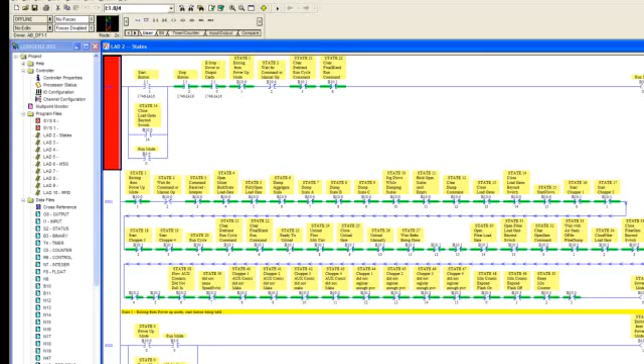Ron is a very effective trainer with a different approach that will straighten out a lot of misconceptions about the PLC, not only for beginners, but for those with many years of experience. Ron is going to give us a quick demonstration of the differences between his PLC Boot Camp approach and other training methods. Well, we've got a long way to go and a short time to get there, so let's get started. These videos are just a quick preview of the type of material you'll cover in one of our PLC boot camps.

and of how different our classes are from any other training approach. Don't expect to sit back and listen to long lectures, and we never use PowerPoint slideshows. Instead, we've built our entire hands-on training approach around a problem-solution format. Basically, we set up one realistic problem after another and then coach you through a systematic step-by-step process of finding the solutions.

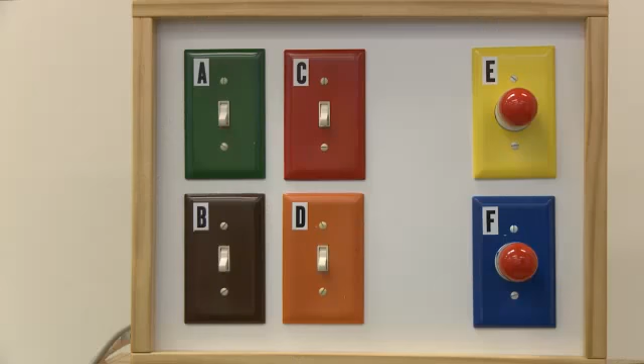For our first video lesson, we'll use this simple little light box for a quick warm-up exercise. Even if you're beyond the beginner stage, stay tuned for just a few minutes. This uncomplicated little box has bewildered quite a few top guns over the years. Let's see how well you can do against it.

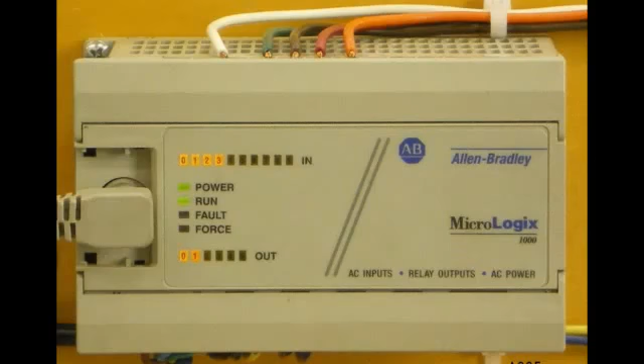If you want to try our first sample problem at home, a MicroLogix system will work just fine. Depending on which boot camp class you sign up for, we'll probably be using either an Allen Bradley SLC 5/04 or an Allen Bradley PLC5 system to control the light box. And yes, we do have boot camp classes for the ControlLogix platform too.

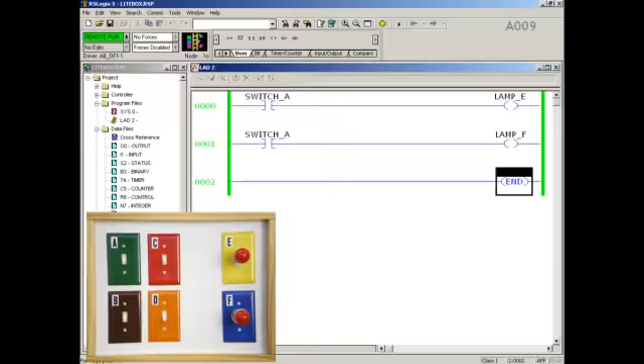And now here's a simple warm-up exercise for the light box. First, here's how many people try to explain the operation of this little program. A warning: what you're about to see does not follow our boot camp approach, and it is not correct. But unfortunately, this is the way a lot of experienced technicians think PLCs operate. We'll identify and correct the mistakes and misconceptions throughout this series of videos.

We'll start with switch A in the on position. Notice that both lamps are on. Many people explain this result by pointing out that the contacts for switch A are called examine if closed or examine on instructions.

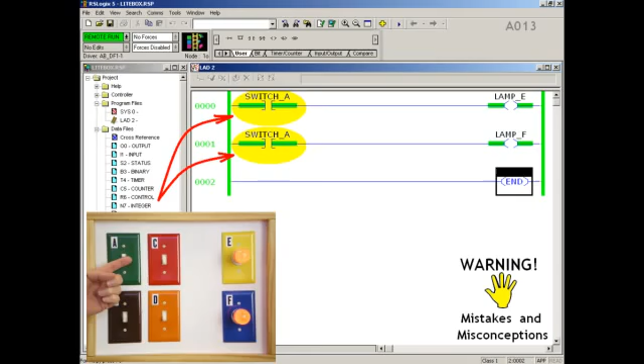Many people believe that each contact in the program examines switch A in the field to see if the switch is closed or on. Since the switch is closed in this example, the contacts in the program change state and become true. The PLC processor marks them green on the screen to indicate rung continuity and allows power to flow from left to right through the rungs.

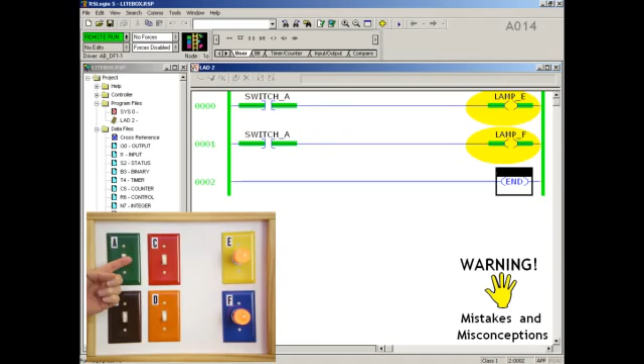Many people say that as the power flows to the right, it reaches the outputs of our program and makes them active, as indicated by the green displays on the screen. These parts of the program are called output energize instructions. Many people think that these work like relay coils, and since they're active in this example, they energize the outputs in the field, which turns on lamp E and lamp F.

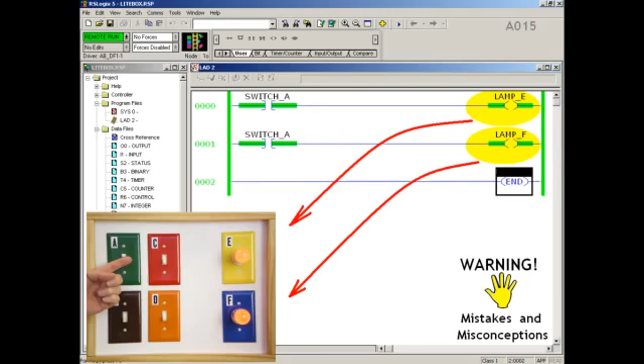Now let's turn switch A off, and now the question becomes, what made the lamps go off? To answer that, many people go back to the contacts again. Many people explain that now when these contacts examine switch A to see if it's closed, the conditions are going to come up false. That's because the switch is off this time around.

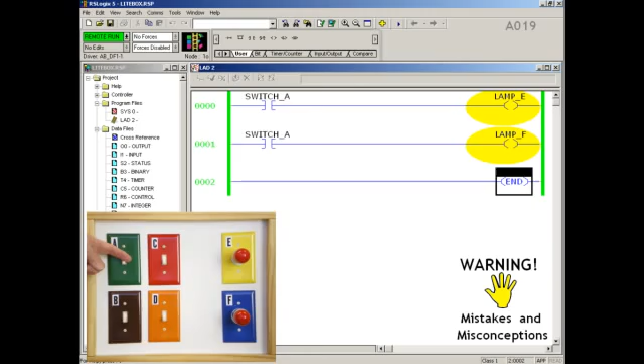Notice that the contacts aren't green anymore, which means that the power signal will not be able to flow through the rungs. Many people use the term inactive to describe the outputs when they're not being powered, and they say that you can tell that these coils are inactive because they're not being shown in green. Many people say that since our relay coils are now inactive, naturally they can't energize the outputs in the field, and that's why lamp E and lamp F both turn off.

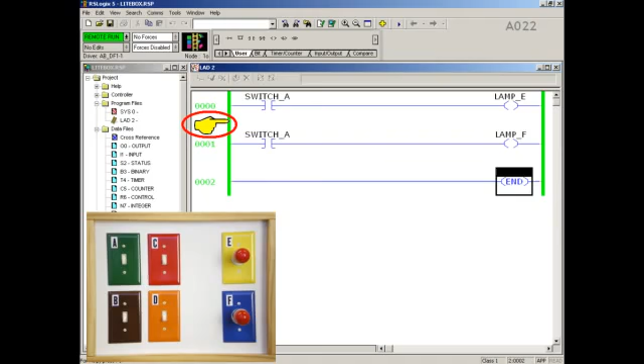And so now we're through with our little warm-up program. Now let's crank it up a notch. Keep your eye on this area right here. We're not going to make any changes to the two rungs we've already checked out, but we are going to slide a new rung right in between them.

If you're like 99% of our students, you've already been through someone else's PLC training, and the explanation that we ran through a few seconds ago was probably very similar, or sometimes word for word, to what you've already been taught. And let's be honest, those mistaken explanations will work okay, but only as long as you stay at the beginner level. Once you start working in the real world, you'll find a lot of situations where the theory you learned doesn't agree with the reality of your problems.

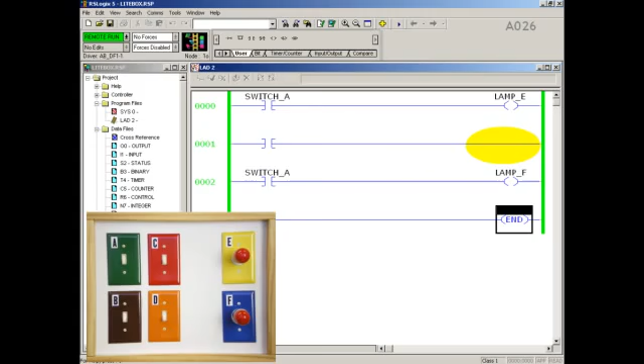This next little rung we're building is designed to jumpstart you all the way through the beginner level. Notice it's not going to be a complicated rung, just the same basic construction that we've been using all along. And for our input, we'll use switch B on our light box. And now for the output, let's use switch A.

Now keep in mind that we're not saying that this is a good way to write a program, and you may never run into something like this ever again. But this little curveball can teach you a lot about how PLCs really operate under the hood.

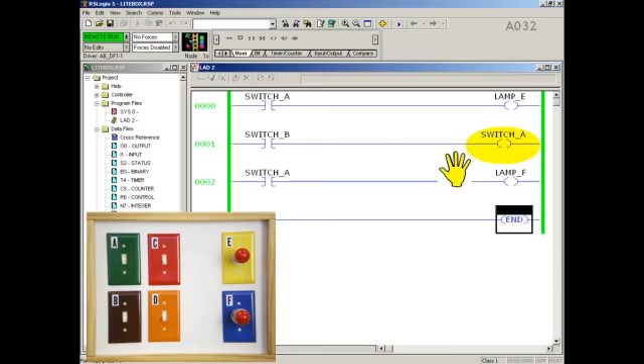All switches are off, both lamps are off, and now the stage is set. The question now becomes, what's going to happen to our two lamps the next time we turn on switch A? First, let's see how many people would approach this problem.

The explanation you're about to hear is based on what many other PLC training courses teach. This is not the boot camp approach.

Many people would tackle that new middle rung first, just to get it out of the way. Notice that switch B is off. Many people say that when the input contacts on the middle rung examine switch B, the processor will find the switch in the field to be open or off. That means there won't be continuity through this rung, so no power will flow downstream.

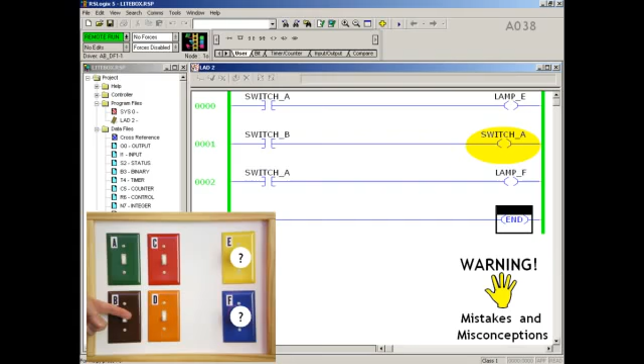Many people think that no power means the rung output will be disabled, so it won't be able to affect or control switch A one way or the other. Besides, many people will tell you there's no way for an output coil in the program to affect an input device like switch A located out in the field.

This isn't a special remote control switch. There's no motor, no coil, nothing out there for the PLC to energize. When you look at it that way, it's obvious why many people think this bogus rung will have no effect on the operation of the light box.

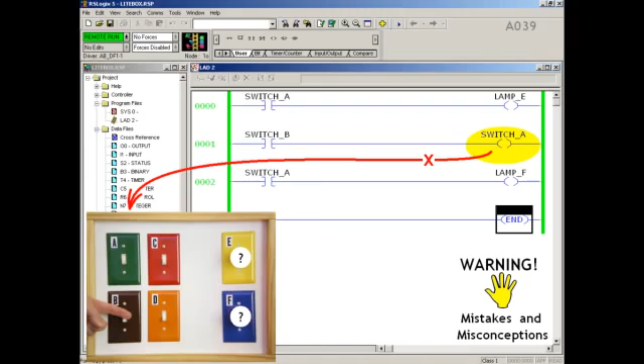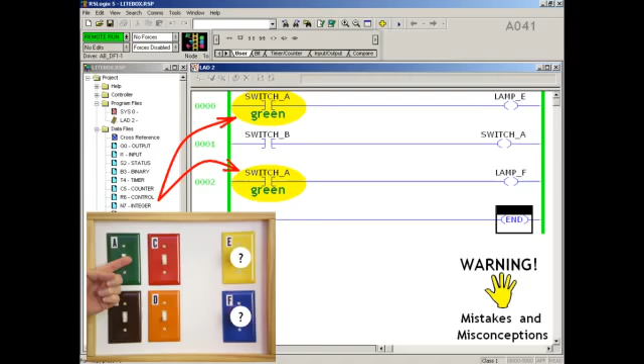Suppose we leave switch B turned off and turn switch A on. Many people would now get back to familiar territory, these two contacts for switch A. Many people explain that both contacts will still examine switch A to see if it's closed or on, and it is. So both instructions should turn green and change state to a true condition, giving us rung continuity. This should let power flow through these two rungs, just like before.

Many people would now say that each of these two output coils will have power flowing in, and each will remain active and enabled as long as switch A stays on, and both should turn green on the screen. Many people explain that the two active coils will still do their output energize jobs and energize the output devices in the field. Based on this, many people expect lamp E and lamp F to both come on when we turn on switch A.

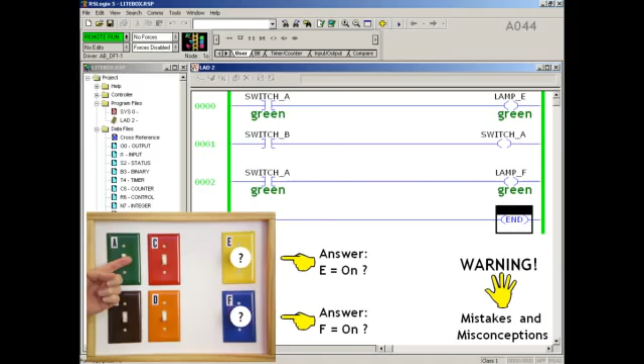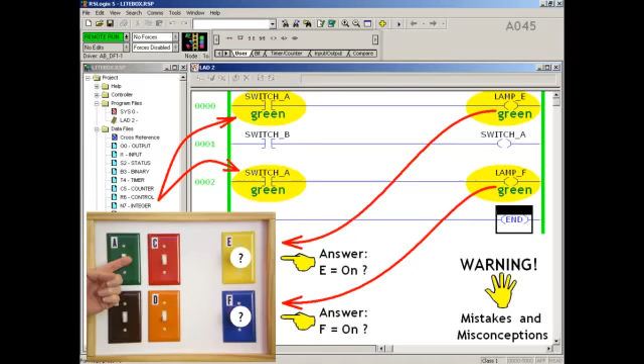But just to double check, many people believe that the contacts in the program will examine switch A to see if it's on. The contacts will be true and allow power to flow to the output coils. Each coil will be active or enabled and energize its output.

So, final answer: lamp E and lamp F will both be on, or at least that's what many people think, especially since they saw our two original rungs working perfectly before and realize we haven't made any changes to either one of them. They worked before, they should work now.

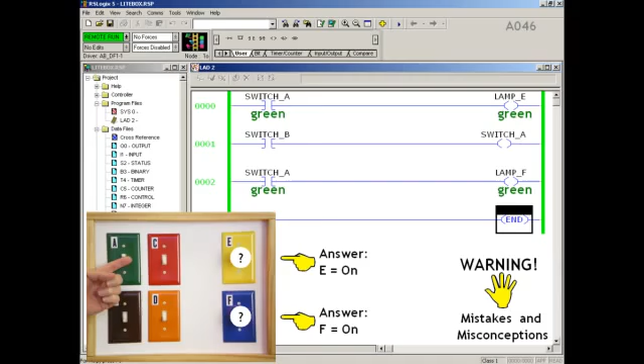We'll give you a chance to pause the video now if you don't want the answer just yet.

One of the reasons our PLC bootcamp approach is so effective is that we don't use the old familiar switches and coils explanations. Instead, the real-world material you'll learn in our classes will take you far beyond the beginner level. And here's what really happens when we turn on switch A.

Lamp E comes on, but lamp F stays off. That was totally predictable, and we'll show you exactly why it happens in this series of videos.

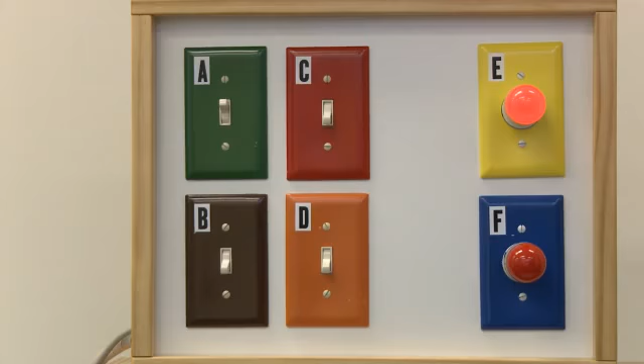Before we look at the programming screen, remember we're using a PLC-5 and serial port communications for our example. If you run this same experiment with a Micrologix or SLC 500 system, the real-world lamps will work exactly the same way, but you'll see a different pattern of green on the screen. We'll put the two systems side by side to make it easier to compare. Pick the left side if you normally work with a PLC-5, or the right side for a SLC 500 or Micrologix system.

On the light box, switch B is off and switch A has just been turned on. And the reality here is that lamp E is on, but lamp F is off, regardless of which PLC system you use. Here are just some of the misconceptions involved in this little exercise.

Many people insist that this type of instruction examines a switch to see if it's on. If it worked that way, then lamp F would be on, because switch A is definitely on out in the field. Many people say that when this type of instruction is enabled, it energizes an output. Well, this one is disabled by switch B, but it's still affecting the program through an input, switch A.

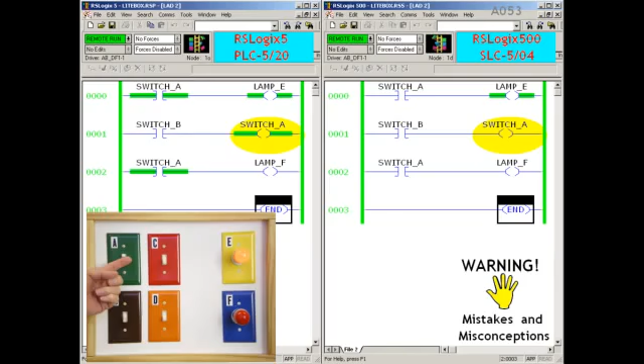Many people insist that green on the screen means true or active and indicates power flow. The instruction at the top is true, but its twin at the bottom is false. Obviously, the green on the screen can't always be trusted.

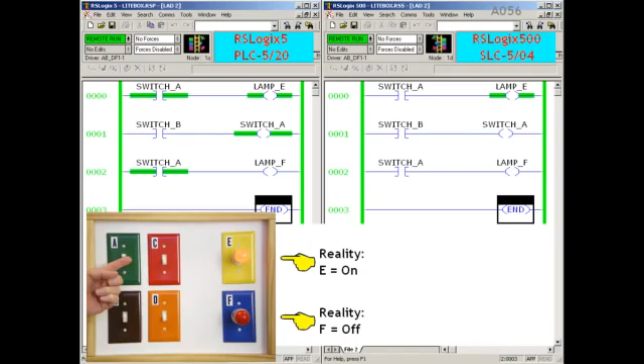So now the big question: is there a way to make sense of all this? Yes, there is, and we'll give you a sample of the systematic step-by-step approach that we teach in our PLC bootcamp classes throughout the rest of these preview videos. We're going to go a lot deeper than the green on the screen and the switches and relay coils explanations that you've probably heard before.